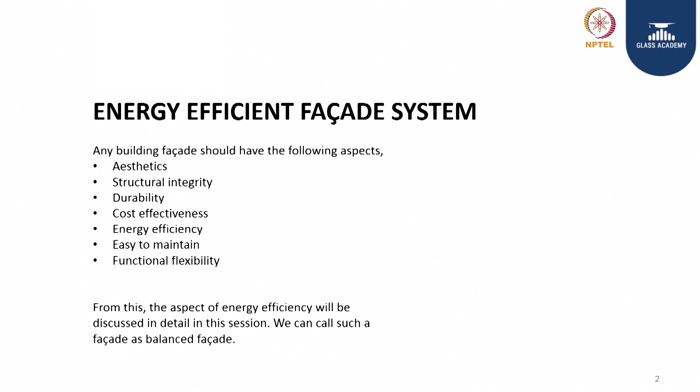When we talk about any facade, it should have 6 to 7 aspects: aesthetics, structural integrity, durability, cost effectiveness, energy efficiency, ease of maintenance, and functional flexibility.

If you look at it, many of these things are contradictory. When we work on one aspect, we have to compromise on another. Today we will discuss a system where energy efficiency is given prime importance, trying to achieve all other aspects at optimum benefit, but giving more importance to energy efficiency.

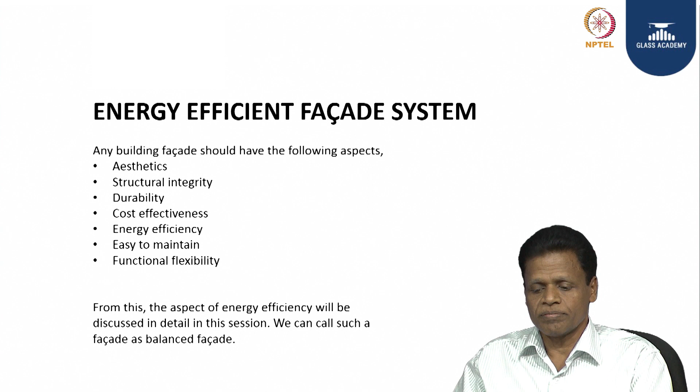The aspect of energy efficiency will be discussed in detail in this session. We can call such a facade a balanced facade.

In recent times in the facade industry, there is a trend to save a lot of energy - energy not spent is energy saved. We approach this in two aspects: first, to spend less energy on air conditioning inside the building, and second, to cut down the energy spent on artificial daylighting. These aspects will be discussed in detail.

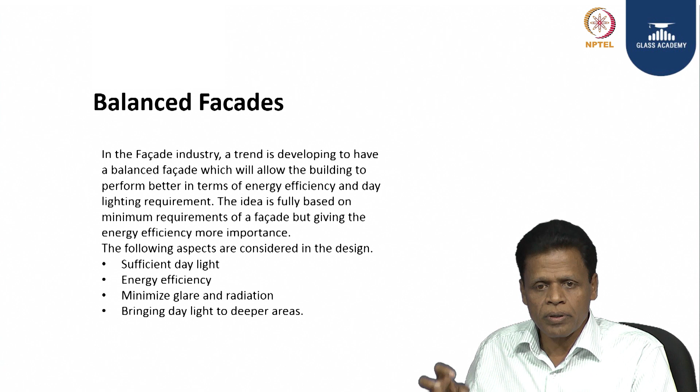If we discuss balanced facade, at least 4 things must be considered: one, sufficient daylight should be there without much artificial lighting; two, energy efficiency where heat ingress must be reduced; three, avoiding glare and radiation so occupants have maximum comfort; and the other challenge is bringing daylight to the deeper, inner core of the building.

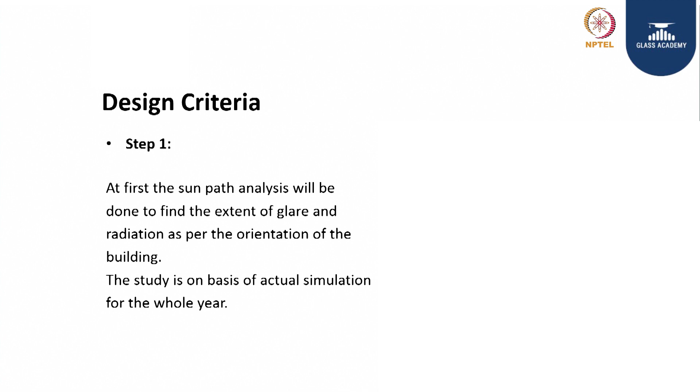To arrive at this design criteria, we consider 7 steps. The first step is sun path analysis. Nowadays, any major building facade design starts with study of the area and sun path analysis as per the building orientation.

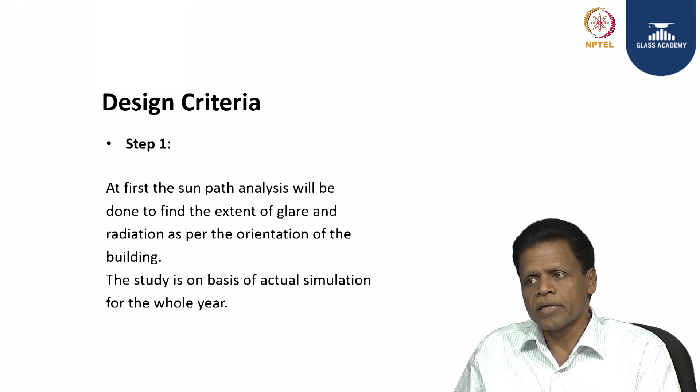Suppose the building orientation is fixed - then a sun path analysis is done considering the whole year, simulating the sun path for all 4 seasons, even hour to hour. This gives clarity on sun penetrations from various parts of the building, so elements can be designed accordingly.

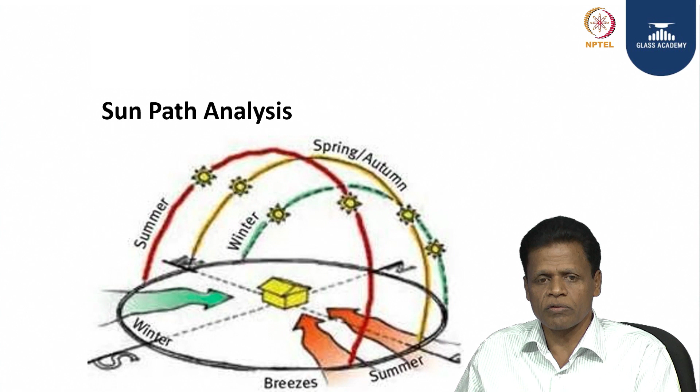The ultimate aim is to have energy efficiency in mind while providing complete comfort to occupants, including those sitting on the periphery of the building. The next step is to propose the facade ideally around 50 to 60% of the floor height.

We can cover the complete floor height also, so the balance portion - that 40 or 35% - is treated as a spandrel panel, where glass is on the outside but insulation is inside, designed for maximum insulation. So the facade in question is around 60% of floor to floor.

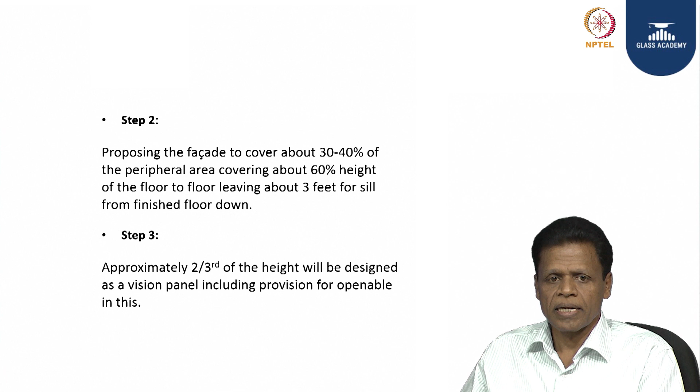This section of the facade is split into 5 definite elements. Take the total height of that 60%, suppose 2.4 meters - around 2/3 of that height is designed as a vision panel. The lower portion is the vision panel, almost 2/3 of the height, and the upper 1/3 is designed as a daylight panel, whose function will be discussed a little later.

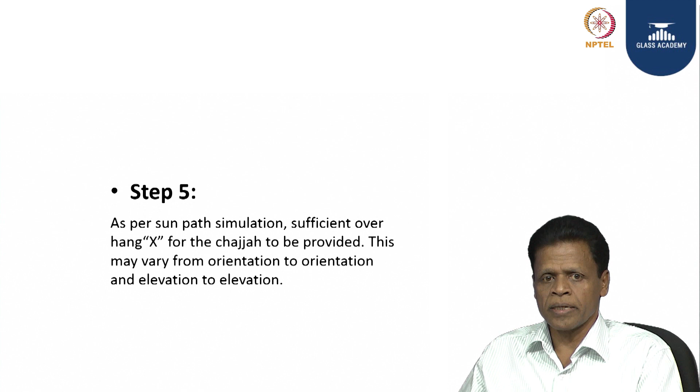These are two major elements, and there is an element called external chajja, where as per the Sunpath analysis a certain width of this chajja will be designed. The primary purpose is to cut down the sun radiations, and it will help to a certain extent in the heavy rainy season also.

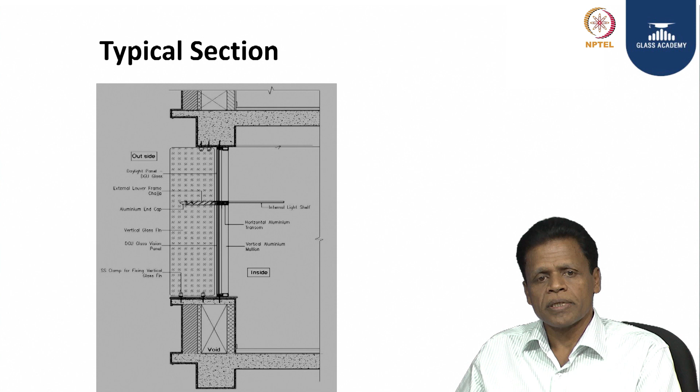Another element you can see inside is what we call a light shelf, which also has the purpose of cutting down the sun radiations and giving light to the internal portion of the building. So, after doing the Sunpath analysis, a section is proposed.

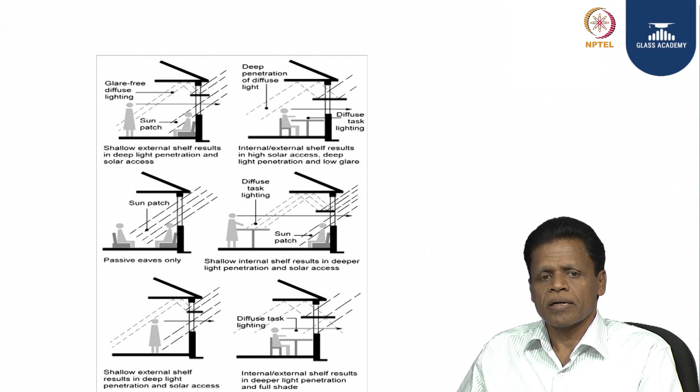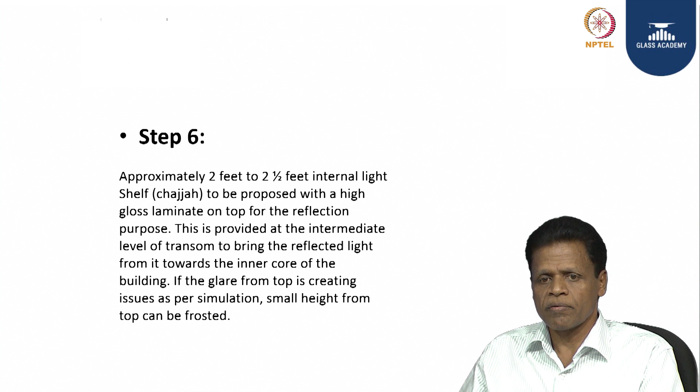Total height, two-thirds is given for the vision panel, one-third is given for the daylight panel. A sufficient width chajja is proposed, and a sufficiently designed internal light shelf is also designed, having the purpose of cutting down the radiation and giving light to the inner portion of the building.

Now, one more area is, during the lateral movement of the sun, we will have radiation even after providing a sufficient width external chajja. Here we address that issue by providing vertical fins in front of our mullions. Frosted glass or other solid thin elements will be placed vertically in front of the mullion, so that radiation due to the lateral movement of the sun will also be arrested.

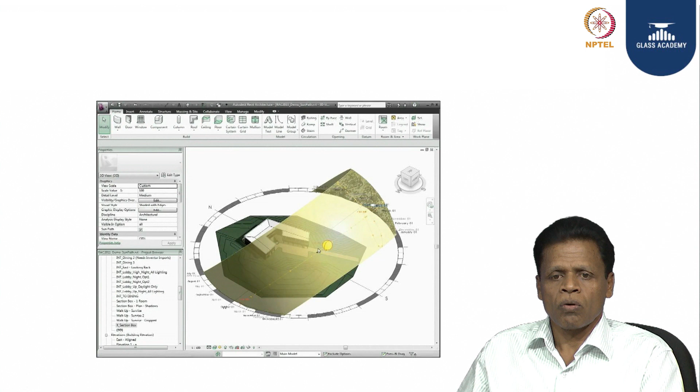We will come back to this particular section, where we have all the elements in place. The design involves...

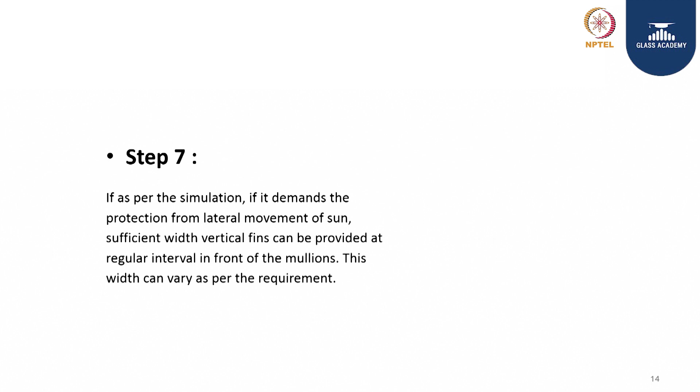As per the data obtained by the Sunpath analysis, we have to select the glass for the vision panel, glass for the daylight panel, a sufficient width design for the external shading element, and there is a width criterion for the internal light shelf, along with providing a glass fin or fin externally, vertically, to cut down the radiation due to lateral movement. This particular section shows a typical section where all these elements except the glass fin are provided.

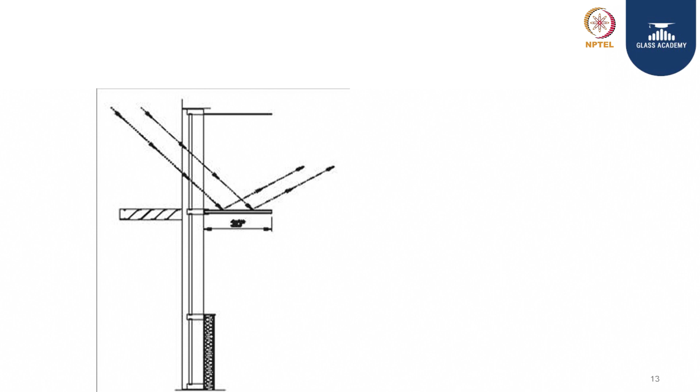If we go back to the section, we have various options for this. This particular glass fin is what we have shown. For all these elements, we have various elements to select from.

Most important, as you know, is the glass selection, where I have seen many sessions here to educate students about the criteria of glass selection. Here we have a very important role in selecting the vision glass, where the purpose is to give sufficient light, but to make maximum insulation.

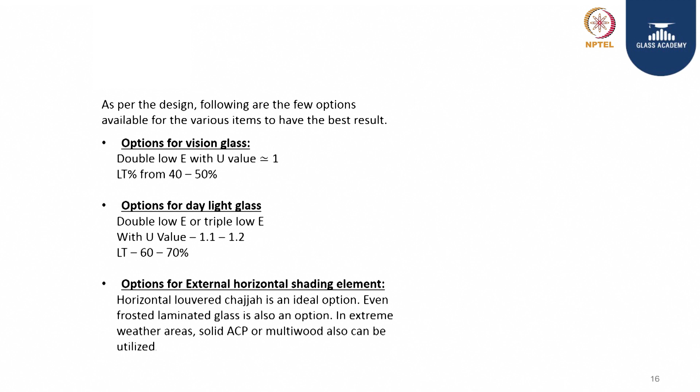I suggest a double Low-E glass of U value around 1. How will we achieve a U value of 1? You are aware that a single glass providing this double Low-E coating may not fetch the required result. What we have to provide here is an insulating glass of sufficient thickness, maybe 27, 30, 32 mm thickness, having inert gas filling in it, and by carefully selecting the light transmission percentage, we can achieve a U value of 1.

Here I suggest for the vision glass a U value of 1 and a light transmission of around 40 to 50%. This 40 to 50% light transmission will be sufficient to give an optimum lux level for the building peripheries. We may have around 300 to 400 lux level, which is more than sufficient to work with.

So the most important of these element selections is the selection of vision glass, because it covers the maximum area of the facade. Go for a double Low-E having around 40 to 50% light transmission. After treating with insulation techniques, we will get a U value of 1.

Here I am not taking any brand for the glass; that selection is for the clients or for you to decide. But we have a range available in the market where LT is mentioned and U value is also mentioned after sufficient treatment. When coming to the upper glass, the daylight glass, again we have to go with Low-E, double Low-E or even triple Low-E.

Here the purpose is a little different. We need to get sufficient light, but at the same time we have to cut down the radiation part of it. This upper one-third of the glass will have a little more open selection, where light transmission will be around 60 to 70%. We can have triple Low-E here.

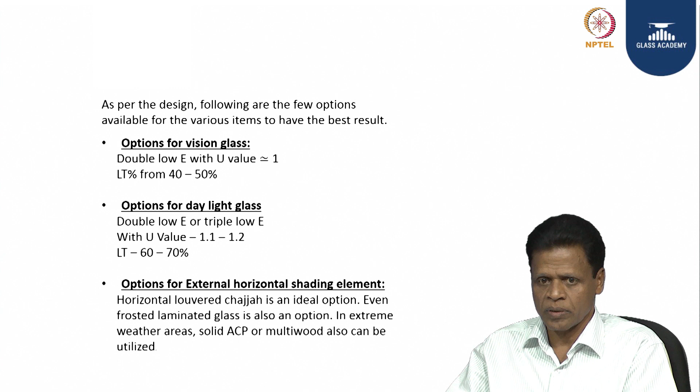Coming back to elements other than these three, we have the internal light shelf, a horizontal element with sufficient width. This width also has to be simulated from the sun path analysis. We use 2 feet to 2.5 feet, a lightweight and thinner horizontal element so it looks nice and goes well with the internal portion of the building. What we need is maybe an MDF with top and bottom treated differently.

Why treat top and bottom differently? The light shelf top should be totally glossy. We need a glossy laminate on top so that radiation coming from outside hits the top, then reflects back to the ceiling of the inner portion, which again reflects back to the inner core of the building. This selection of internal light shelf plays a very big role in bringing sufficient daylight to the inner core. Usually we go with a very high gloss white laminate on top, so whatever light comes on it reflects totally to the ceiling, which in turn reflects back to the inner core of the building.

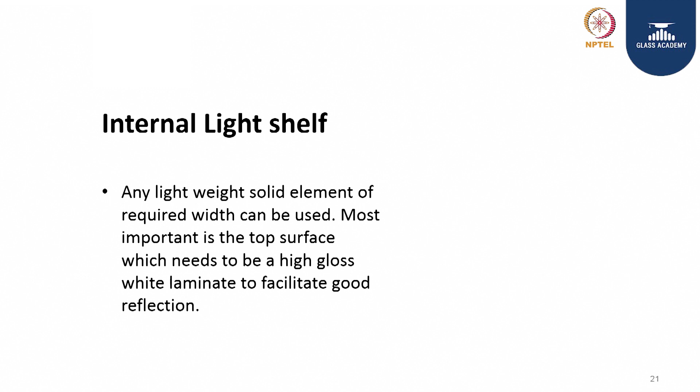Usually we have all the options. We have frosted glass as the first option because it goes very well with the aesthetics, easy to clean, and when we frost it, it will cut down the sun radiation up to a certain extent, and still give a little glow or diffuse light to the facade. We have solid fins we can give, even ACP fins are possible, but it will look bulky. Glass fins always will be thinner and neat.

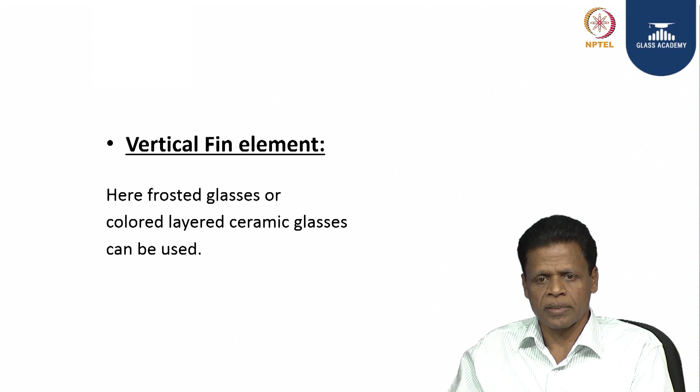These are all various options for glass fins again. Nowadays a lot of colors are coming into play. Safety treated glass fins can be used for this purpose. Usually ceramic fritted glass will be used. Here we have to add the safety also, so always such glasses will be used with

lamination of sufficient thickness. After discussing the balanced facade, we have further methods to enhance the energy efficiency. We can bring down heat ingress to the building further by using this particular technique, thermally broken system. This thermal break usually will be used to cut down the heat ingress through the aluminum. Any facade having metal, lightweight metal like aluminum, and major area will be covered with the glass.

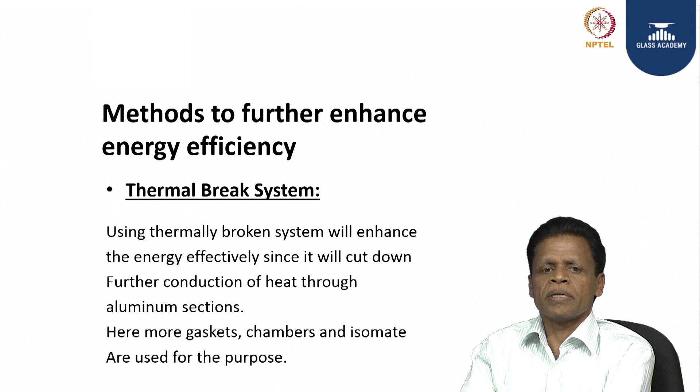We have all the techniques of treating the glass to bring down the heat ingress, where we have double glazing techniques using the space with inert gas. We have lamination techniques, all bringing down the U value of the glass area, where the heat conduction through the metal aluminum is taken care of by using a technique called thermally broken system.

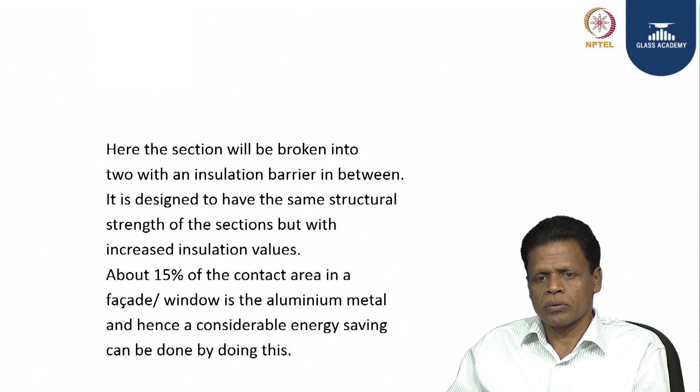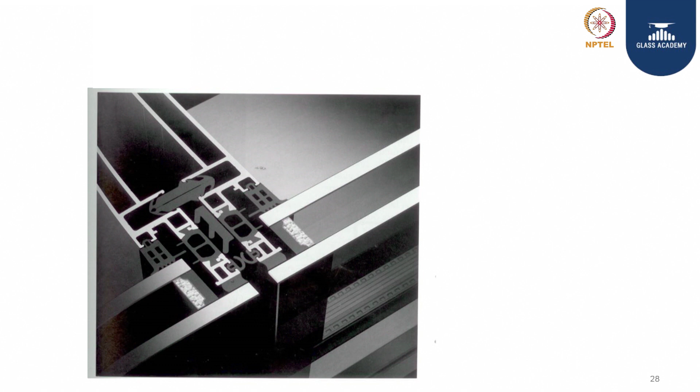Here the aluminum sections, structurally strong aluminum sections, will be designed and broken into two, isolated from inside and outside. If you see the section, the glass is outside, inside is the aluminum section, where the structural part of it is split into two or split into many compartments, where the direct chance of direct heat ingress is reduced. We use an insulation material called isomate. By this we can cut down the heat ingress through the aluminum metal.

Any facade will have 10 to 15% of the metal and balance 80 to 85 to 90% glass area, where this 15% of the area is further strengthened by using this technique. This is what we discuss about balanced facade today.

I will summarize. We have a facade having many functional aspects. Out of that, one particular aspect is considered for energy efficiency today, where 7 steps are there. Starting with sun path analysis, we have to carefully select the systems, sections, height of the facade, a balanced facade. Then later all the elements of daylight, vision glass, external shading element, internal shading element, glass fins are designed.

All the width and selections are all depending on the requirement of your energy efficiency and sun path analysis of the area, and we have to provide the sections with sufficient glass fins on front to cut down the radiations. Here energy ingress is also controlled, and we are bringing sufficient daylight to the building. So when we achieve all this from a normal facade, this particular facade is called a balanced facade. Thank you.